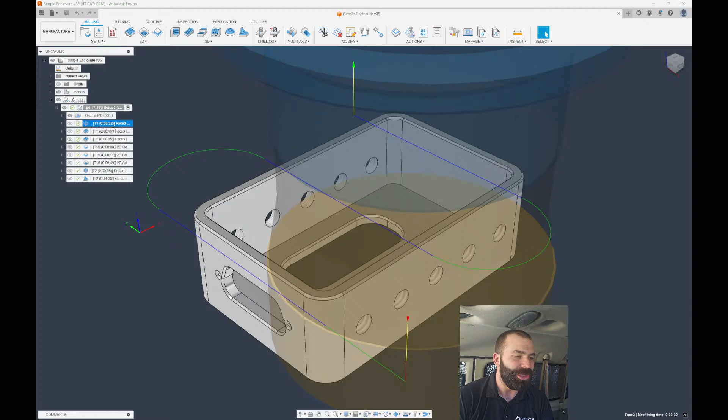I'm here to answer in any way possible. I'm going to make sure we're all the way scrolled down on chat over here, and I'm going to pull out the simple enclosure file. Now bear with me, I am on Starlink, so if it gets a little spotty we'll go ahead and be able to fix that as we go. So come on, we're going to let this thing load up. I guess I should have opened some files, that's on me. If any of you guys know, on a slow internet connection, Fusion can be a little slow. But as you can see here, I have toolpaths already on a part.

Now a question I saw on Facebook was, hey, I would like to add notes to a specific toolpath. So a lot of people came around and said things like you can do a manual NC and add a comment, things of that nature. But this is kind of, the whole manual NC thing works good, but what can happen with that is it's for programming stops and things of that nature.

Now I can actually put a note on a toolpath, which is super neat here. So we can edit notes and then you could say, check tool. Or actually, what would be a really good one is tool uses offset, whatever, right, 107 for diameter. So the cool thing with these notes is on your toolpath, you get that little note symbol next to that actual physical path. But when you post out this G-code, the great thing is it is going to post out.

And then depending on what post you're using, I'm going to go ahead and swap out to a simpler post. And what you need to turn on is called show notes.

So under formats here in this post, if I turn on show notes, what's going to happen is all of those toolpath notes that you've plugged into Fusion are automatically going to be output inside of your G-code right after the statement of that toolpath.

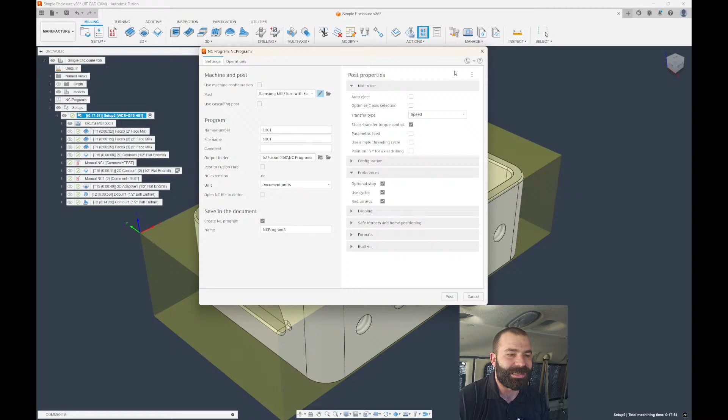It does give me a perfect chance to grab a water real quick. It's been a rough week for yours truly, going from SHOT Show all the way back down into Iowa, traveling across country.

And I'm not seeing a whole lot in chat. You guys just come in here to hang out with me. Usually you guys are flooding me with questions by this point. I feel like it's always, I've got to get this thing going in the first 20 minutes, and then all of a sudden it takes off, right? So, cool, not seeing a whole lot of... oh, there's Deep Thinker.

Is there a way to do serial numbering? So actually at the moment, Deep Thinker, there is not a way to do serial numbering inside of Fusion. But as we've talked about, depending on your machine, it's going to be a sub-program or sub-routine call-out. You can enter that in as a pass-through, and upon it being a pass-through, you could put whatever that information is, and that would call it out. So if it was an M98P, let's go 2525 call-out, when I post that out based on my tool paths here.

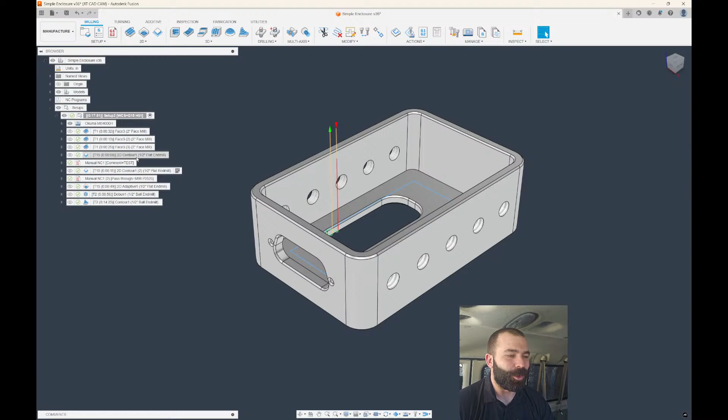But did any of you guys see in this latest update the new Heights stuff they did to us? I'm surprised more people haven't freaked out about that. In the Heights tab, you now have these lovely icons, as almost like yours truly over here made a suggestion that it would be nice to be able to say highest of, but yet do something like this. We're going to swap things over so we could show this in a more real-time scenario, right? I got to think where my parts are going to be here. Actually, we're going to go for a part in the default library. So cam samples, and we need a part with a jig and a fixture and everything all in one, right? Here we go, intro to 3+2.

So one of my favorite things is the fact that now we have control in a different way, right? So like on a toolpath, I'm going to just go ahead and dump everything here so we could just do brand new toolpaths on this part. But if I was to go in and just say 3D adaptive clearing, the old, like when they made that jump from the Heights tab, and this is what drives me mad, is they brought back stock bottom for all of the traditional kind of guys out there. But as you're going to see is I'm going to go down, and this was my thing about this, right?

Like I want to go to a bottom height, and what I would like to say is lowest, but then I also want to be saying, highest of top of fixture, right? So again, it's going to look at the lowest of stock. We're going to look at the lowest of bottom. Actually, we're going to go ahead and ignore. And then it's going to still respect the highest of the top of our fixture. This was a big thing to me. And it's going to take me some adjusting, as it's probably going to take all of you time to adjust to this new system.

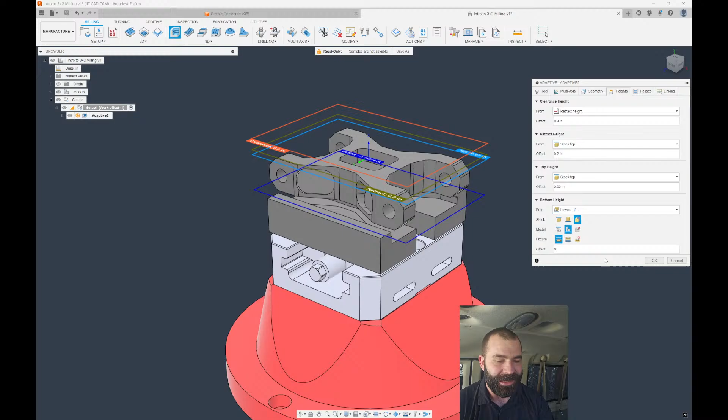But the fact that you can now say lowest, but yet still use the highest of a certain situation, right? This is something massive to consider in these different scenarios of how you're going to program your part or set yourself up for success with templates. This was super neat to me, to be able to go down to model bottom or go to the lowest.

What is lower? Is model bottom lower, or is my fixture top the actual lowest point? This is something I absolutely love, guys. This was a good one on Autodesk's part, by all means.

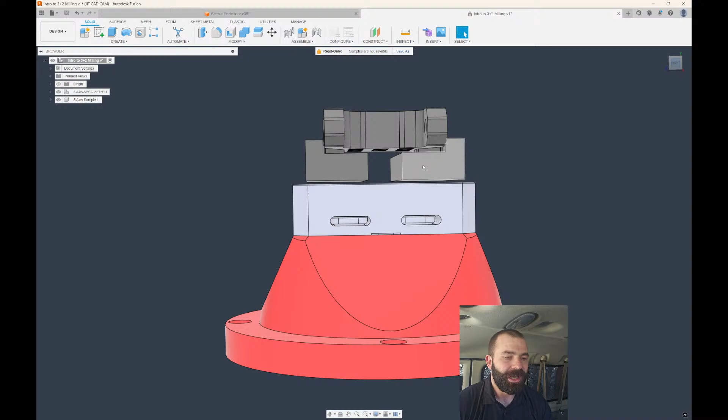To see how this can actually work out really well, if I was to move said part, we're going to need to not pick a face, but a component. And if we were to drop our component down inside of our jig and fixture, now our model bottom is no longer that part. So we go back into our manufacture and regenerate this toolpath.

What you'll see is we're going to respect the lowest point. In this case, we actually hit our jig because we're avoiding our fixture, due to fixture avoidance in our setup. But as you can see, we're now able to machine down based on those settings we've put to the lowest point possible. Our model bottom now exceeds the fixture top, meaning our toolpath can actually go lower. And because of our fixture avoidance, it's now avoiding hitting our actual fixtures.

So I'm going to jump over to show you guys this fixture avoidance setting. We have a default setting of a certain amount. Now if we want to change that default for just this toolpath, we could type in a negative value, and it will reduce it—not a full inch, let's go 100 thou. It will reduce that temporarily for just that toolpath.

I think you guys lost me again as my live stream is cutting out. This is obviously not going the best, but I'm going to keep talking as if it's going to work eventually. Let's go ahead and get back in here and see if this loads. There we go, we should be back.

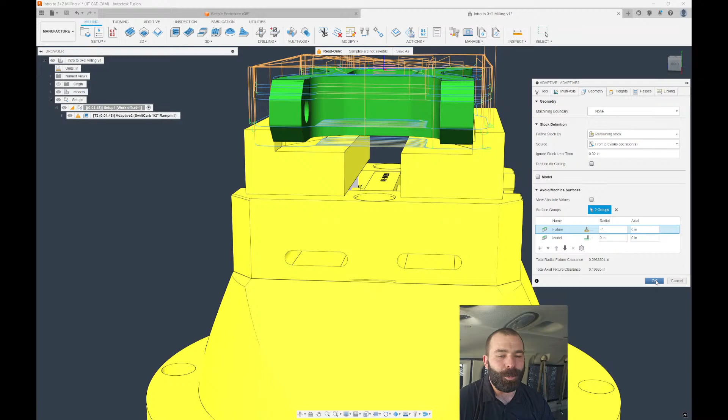But as you can see, we have the ability to adjust this strictly at the toolpath level, as if we were going to add an additional model at the toolpath level, or we can adjust it more globally at our setup level. So if we only want to avoid our jig by 50, we could plug in 50 instead here, and then globally it basically affects each and every toolpath.

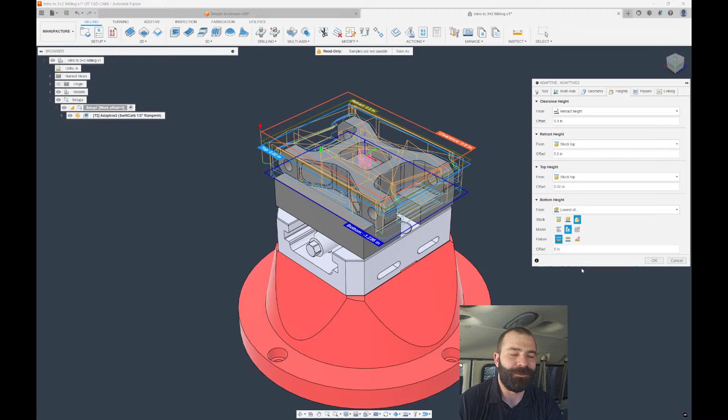So in my opinion, I like what they did with the heights tab. I like that they also brought back the traditional stock top, model bottom type thing, because I don't think one is right or wrong. The more I played with it, the more I like the highest of or lowest of option, because it will say upper or lower threshold, and I can see the value there as we start to work more in the future.

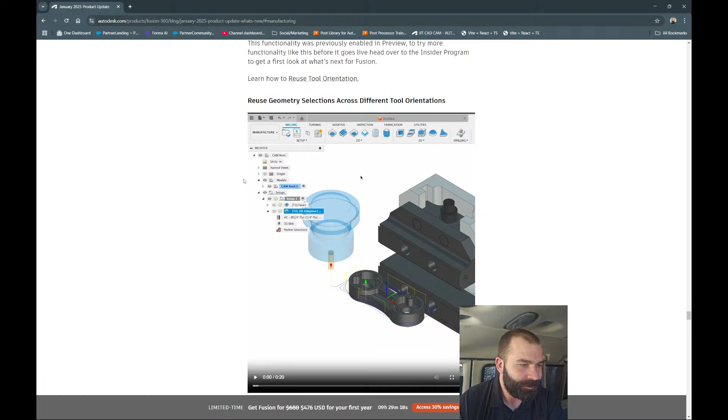Reuse geometry selection across different tool orientations. So you could reuse, I think they're setting a manual.

That's sick. Look at that. You can now pick your tool orientation and your pocket or chains from one to the other. That's going to be super nifty.

I'm going to challenge you guys. Who could actually come up with one of the most creative ways to use this? Because I see this, and to me, if I was to go in, let's just do this with a 2D toolpath. Let's really put it through its paces, right?

Tool orientation, we're going to go here. And we're going to pick that pocket, of course. So I'm going to go ahead and pick the floor. Geometry, boom. And now if I wanted to do another toolpath, got to go ahead and flip that here.

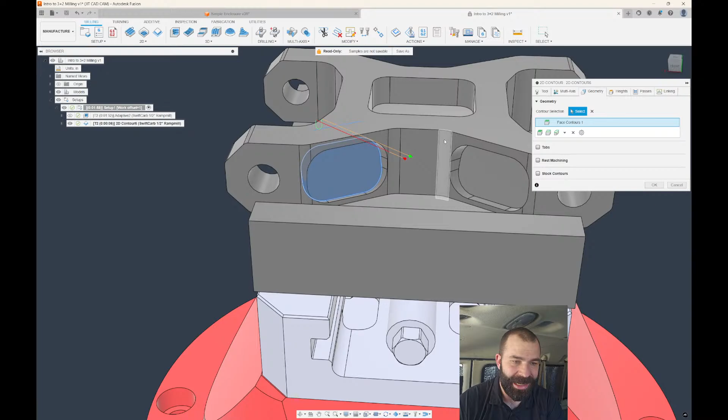So I've had this happen before, and I am really happy it's happening right now because I had a customer come to me about something. Do you guys see how I'm picking that floor and it's giving me the option by default?

Pretty sure Autodesk has changed something, but it's doing a face contour. Now, face contour is handy as heck if you're doing like a flat surface and you want to chamfer around a part, you can use that face contour.

But they were going through and they were picking all the chains on something, and I said, dude, what are you doing? And the reason is because it used to actually by default do a pocket selection, and that's what I wanted here. So I'm super happy this popped up.

But if I pick that face based on a pocket selection, notice how I get my hard line boundary back around my part. So as you can see, again, I've now got my toolpath. My toolpath has a contour selection.

It also has a tool orientation here, which means if we were living life dangerous, which why not, right? Let's do trying to think what's going to be fun. Let's do a scallop. Can we just go from 2D to 3D?

So if I go in and I say tool orientation, coordinate system is this guy. Oh, look at that. Automatic tool orientation based on that other tool path.

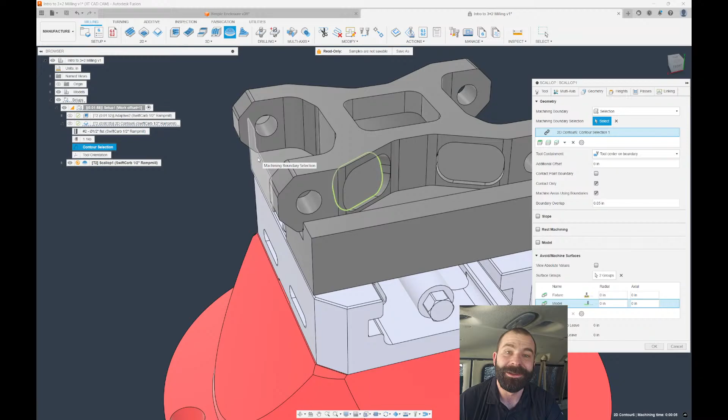And then geometry-wise, I'm going to assume we can't do a boundary selection. Oh, you can. You guys see this? This is wild. Now, what's really neat is this is linked.

So if one changes, I'm assuming the other one is going to automatically update as well, right? That is super, super neat.

So again, terrible toolpath, guys. I agree with any of you before you say anything in chat.

See, oh, we got all kinds of messages in chat. Sorry, guys, they're just starting to come in.

So, rebuild a PC and lost your entire tool library. So PC Alpha, let me show you something here. So what you need to do is you need to go to your preferences.

And in your preferences, you need to actually go to manufacture and turn on your cloud library. So make sure you turn on your cloud library.

Again, I'm going to put this on Autodesk because apparently they listened about fixture top as the lowest. But why isn't the cloud library enabled by default on everybody's license? I don't get it. I really don't.

But we're going to enable that cloud library. And upon checking that box, what we're going to do is if we look at our tool library, what you're going to notice is I now have the cloud area. So let's shrink these up a little bit.

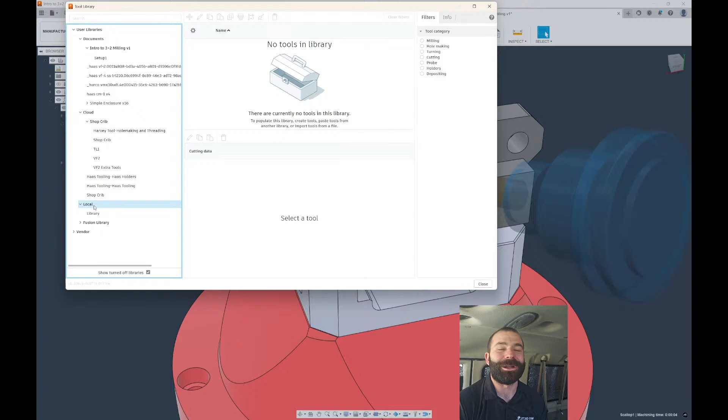So you would normally just have local, but now I have cloud. If you've lost all your tools because your computer died, one big thing is stop saving them to your local area. Now, I am the exception to the rule because I have to edit machines and tools for a lot of you guys who put in tickets with me. That's why I put them in my local area, it's a temporary bucket that I clean out periodically. But as you can see, I have my cloud area. If I was using Haas tool holders or a VF2 machine, I can keep that in the cloud, allowing everybody on my team to use it. Also, when I'm on the road, I jump from a laptop to my desktop at my house, and everything moves back and forth super clean. So it should work more than acceptable for everybody on the shop floor. So PC, I hope that kind of answers your question on how to fix that.

And Deep Thinker, I see that you jumped in there. I appreciate it. Yes, 100%, put it in the cloud.

We got Matt Van Loo with super long cycle times again today, so he's joining the chat.

TC, I don't think you can ever actually be new to this or not new to this, right? Like this new update, as a guy that's been using Fusion for 8 years now, it's crazy to me that all these updates come out and I feel new to it. You guys saw it in real time when I opened up Fusion today and I was like, boom, oh wow, the heights tab has changed, right? Again, we're either back to stock or your highest settings, and the icons and all the stuff that happens.

As I tell most people, I have no idea what I'm doing. That's my big thing, right? I just know how to figure it out or how to make it work. But outside of it, awesome, cool.

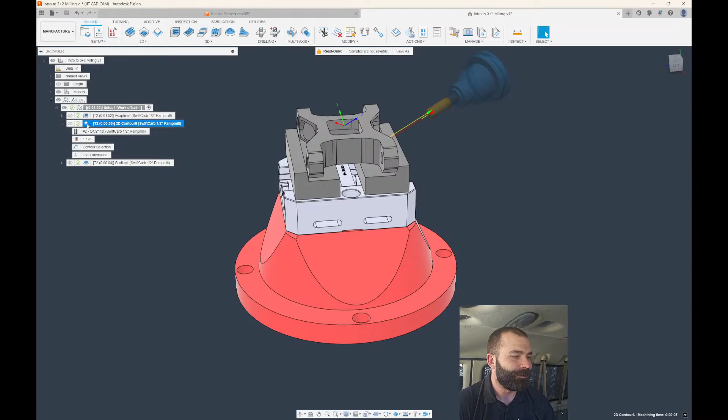So I'm going to show you another one while we wait for a ton more questions to come in. I'm going to think about the best way that I can get this to happen, and I think it's going to work better with 3D, but I want to check it in 2D. So as we're going to see, yep, okay, cool. So in 3D toolpaths, especially getting into your...

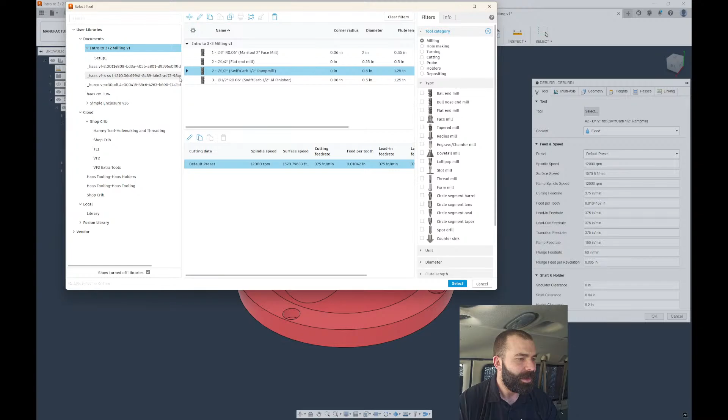So the clearance geometry is pretty big at the end of the day. We're going to go ahead and click on tool orientation again because what I want to do is get you guys set up. Let's go ahead and switch toolpaths altogether. This might not be it, let's do a deburr toolpath. I believe deburr is going to have what we need. So let's get our ball end mill from somewhere.

There we go, let's go full 5-axis. Now, as you're seeing, our geometries by default are set to automatic. But I wanted to create this system because I've gotten this question a couple times over the last week, where using 5-axis, you can see how all of your clearances may or may not be jumping a mile away from your part or over traveling your machine. So this was something somebody brought to me.

For this sake, let's narrow down what we're doing. I'm going to say selection only, and I only want to do this space here. Let me get a real nasty version. There we go. Notice how far this tool is coming in on this part. This could over travel your machine and cause a lot of problems, right?

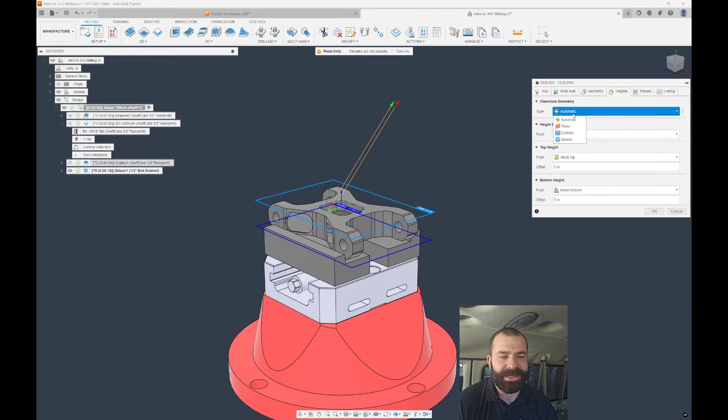Well, what we can do is customize our heights based on different types of modes. One thing we could do is set a clearance based on maybe a sphere. That sphere needs to come from a point if you're going to set that manually, so I'd need a sketch point to go off of, or in this case, we could go based on our setup WCS origin.

And then we have the ability to create things like a specific diameter. This is kind of neat. If you set that diameter to say 3 inches, now all my clearances come from that ball diameter. So what's neat is my lead ins, lead outs, and linkings have now been modified to that sphere and then come down into my part.

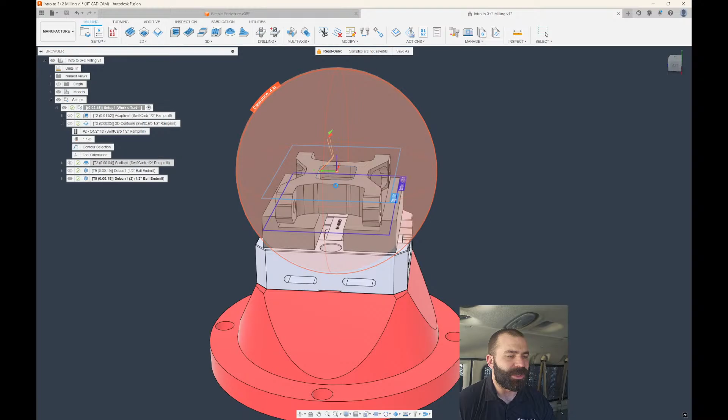So if I duplicate for another example here, again we're going to go in, and this time we'll say maybe an 8-inch sphere. What you're going to notice is we're getting different results on how that tool interacts with our part and where it's going to start from to get down inside of there. So again, we could duplicate that.

We could switch out from a cylinder. Let's actually go to a cylinder, direction based on our setup X. The same thing is going to apply again. Now, if we added a lot more toolpaths here, we could also change that diameter going back down to like 3 inches, and we'll get a similar result as you guys saw.

So this is getting into collision avoidance and how we lead and link things into our part. You have full control over that based on those settings. Now, something you can do outside of that, I'm going to go back to the original one and set that back to automatic. A lot of people haven't realized yet, but you have the same ability to control stuff up here at the top under modify.

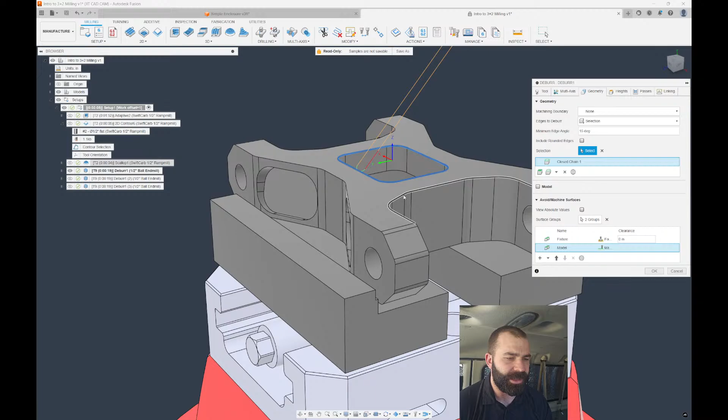So you have your leads and linking moves. Again, you can modify them also using the same kind of theory and strategy for when it's going to jump from one place to another. If we were to add in a few more chains here, let's go to my geometry. Let's say we want to do this edge and this edge. Now what you're going to see is notice how we're jumping up super high in the sky.

But if we were to do a lead and link modification, we could actually go through and modify all moves if we wanted, or we could do individual moves. Again, you have that ability to select things. For example, we start here very far away from our part, and then we're going to retract way up. So I would like to modify these two and only those two.

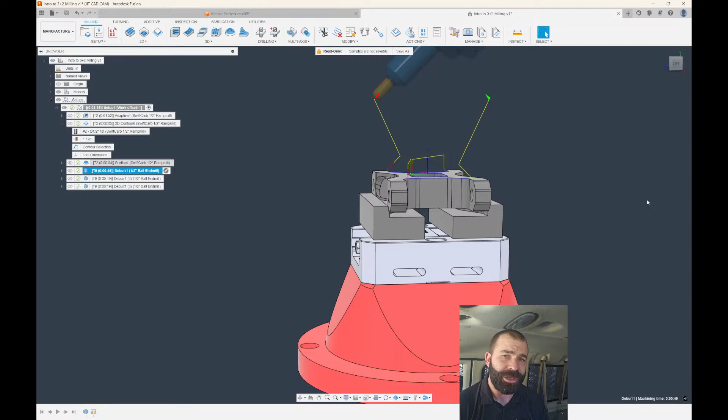Let's just leave it by default because, as you guys know, I'm a firm believer of hitting OK. Let's go ahead and see what we get for a result. So we can individually manipulate leads and linking moves. Again, you have to have the extension to Fusion in order to do this, but this is very, very handy when you're getting into wild 5-axis type stuff.

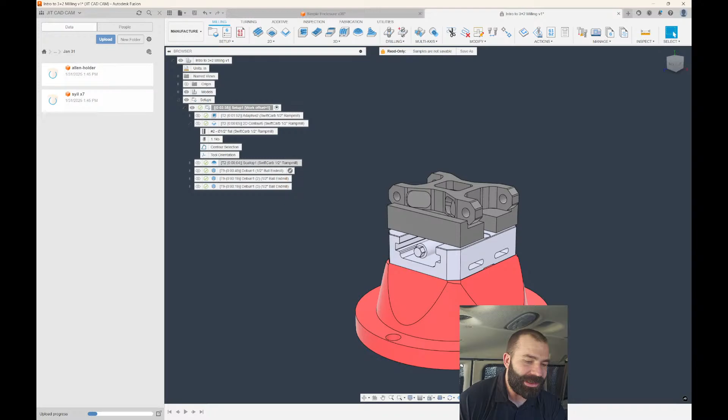Other than that, you guys, how's everybody's week going? Let me turn my mic down just a touch - I could do that. All right, let's see here. Get the mic turned down. Is that better? You guys still hear me? Not peaking out as bad?

I get a little excited once we get going and I start yelling. For anybody that's met me in person, you guys know I'm a loud person in the first place.

All right, so we got our part. Oh, this is a good part too - let's see some stuff on this part, this is a really good part. So the question is the way he was facing off this part, I'm going to go ahead and flip some things around here real quick. We have the ability to change our path direction, of course.

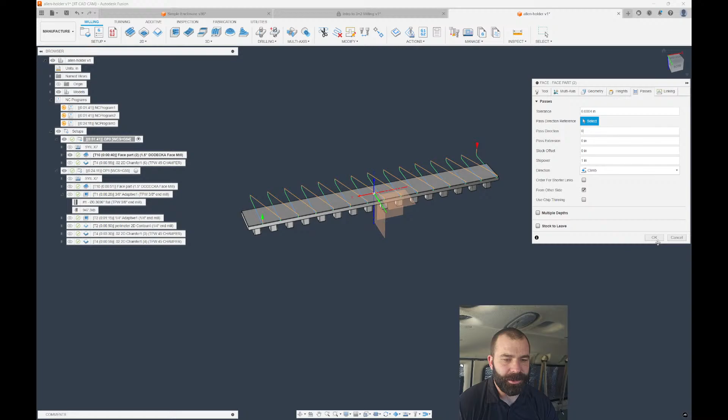Oh, let's see what we got going on here. Stock offset - oh, you got it set there at 90, we're going to go ahead and zero that out. There we go. So the problem that Jeff was asking was the ability to go ahead and face off a part, but he's almost over traveling his machine.

So the good news is I think he has his machine in here, so let's go ahead and do a simulate with machine. And as you guys can see, we have our machine. And if we go ahead and simulate what's going on, the problem is on his machine, which will look a little weird, but his travel is actually limited down here. He can't get his spindle as far over left and right as some of you guys may be able to do. But he was curious, is there a way to start and bring that tool in kind of in an L shape?

By default, there's no real easy way to do this. With this toolpath, he's just making maybe one pass, or two passes based on a step over. So what he could do in this situation is actually use a trace toolpath to achieve what he's trying to do. I've seen this before, and it's a super neat way to do it.

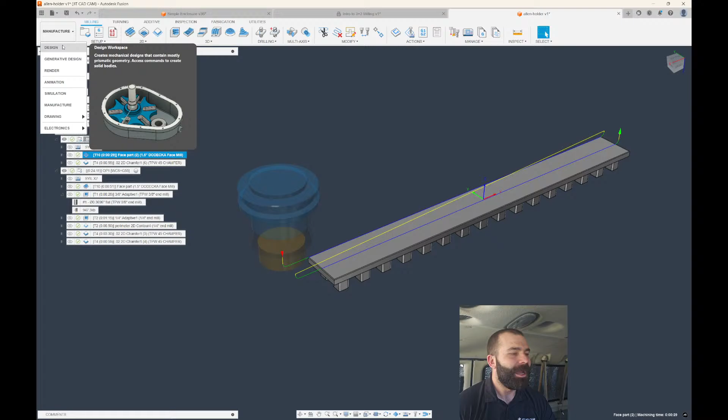If we create a sketch on that top face, and create the kind of profile that I want my tool to follow, I'll make this very generic here. Then with that, I have the ability to grab these edges or constrain them using my actual constraint tools or dimensioning.

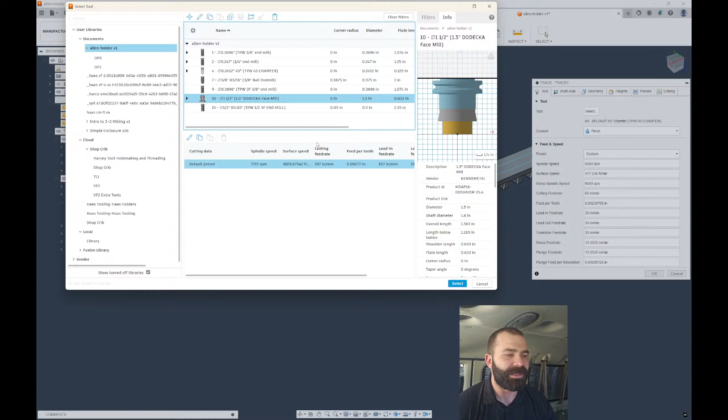Going back to the manufacture side of things, the reason why a trace toolpath here would be extremely beneficial is because I can select using the center line of the tool off that sketched line. He's got a 1.5 inch tool here. Our geometry is now going to be this edge, which runs down and around. As you can see, my toolpath follows my sketch.

So if he's facing an x-axis over travel issue, using that sketched profile, I can use that to my advantage to control how that tool enters in, as he was asking, on the y-axis because of his over travel.

Keep in mind, yes, I know we're conventional milling on this feed move. I just wanted to show you the system of creating that sketch. We should probably go the other way at the end of the day so we're making that lovely clean cut. But what you're seeing is the ability to run down that part, come off whatever that distance is, and then run back across that part and exit.

Now, I could have added another line here. Yes, there's a lot of things I could have done to fix this. I think I just lost video, but it seems like I don't actually lose video. You guys are still watching me live. Hopefully I'll come back here in a second.

Usually takes a second, so let me pull myself back up. But the idea is still the same, you're seeing me do this with nothing more than a trace toolpath. So let's slow that down a little bit.

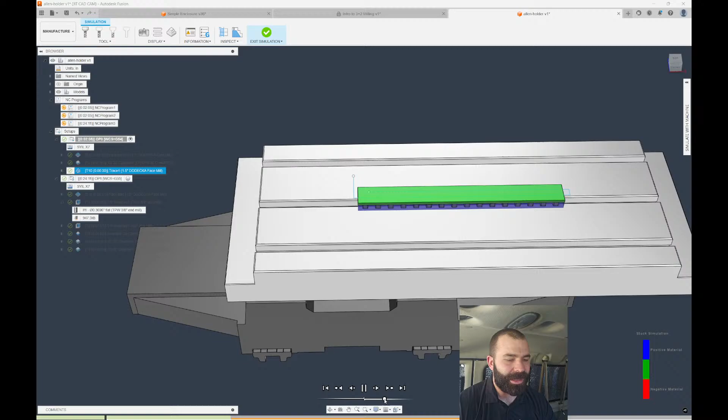Again, I can now manually control that facing operation to come into that part and come down and around. We could add a second dog leg there if we want, or extend that first chain to go around. We could of course do things like multiple depths, all fully controllable inside the software. It isn't going to be as automatic, but the idea is still the same - if I wanted to make 3 step downs, there are my 3 step downs at whatever dimension to create those profiles.

So again, just a little different way of thinking. As you can see, I'm able to go in and create that profile and define that to be able to machine off using that actual sketch that I created.

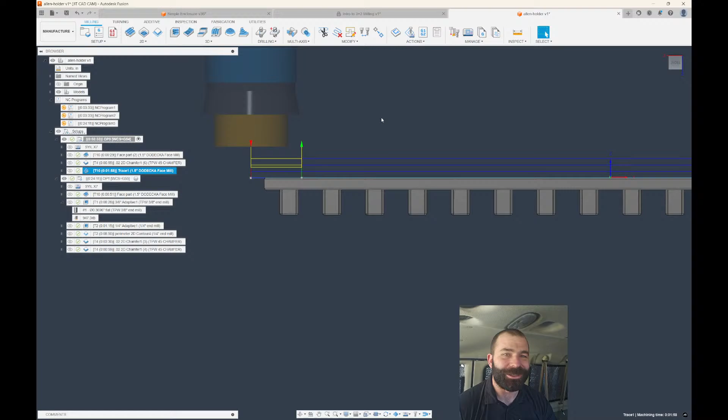Now, shout out to another Phil, which you guys are going to laugh about. There's a Part Maker Phil out there that I worked with. He uses Part Maker, he's the wizard, as you may say the grand old man of Part Maker. He showed me this technique in Part Maker when we were looking at doing a part, and I'm going to sketch this for you guys.

Let's just say we have a round part. Props if you guys can find the video where I think he does this - I'm not going to tell you where it is. But if you had a part like this, and we have a cutout on that part, we're going to go ahead and do this, and we might bring that up just a hair.

I assume you guys get an absolute kick out of watching me model stuff every once in a while, but I think we're all guilty of this, right? So for some reason, an engineer out there has put a 60 thou radius here, and we need to basically machine this flat and cut that fillet. Now, a lot of you are probably already thinking there's a lot of ways to do that - we could have gone in, and let's get this set up here, Z-axis up.

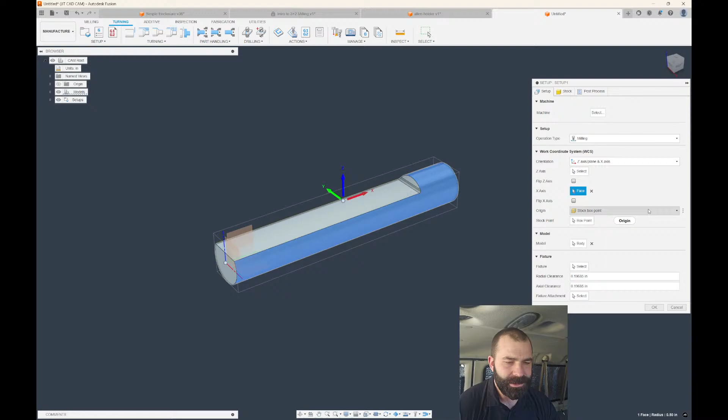We are not on a lathe today. We're going to go ahead and use some round stock based on an axis, rounded up by zero, of course. And with that, we have our Z-axis. Let's go ahead and do this as if it's going to be on an axis-rotated machine, right? So we're going to do this in the rotary, or you just put it in the vise. You need to rotate it. But that same concept still comes into play here.

So if I needed to go in and machine something like this, I think a lot of us are thinking, oh yeah, Fusion and Phil, you could do that with adaptive clearing, right? And we could pick our pocket, or as you'll see, I'll actually say this is my pocket to work with. Let me hold my Alt key this time. And then maybe I want to machine down to a selected floor. And then I know my tool in this case.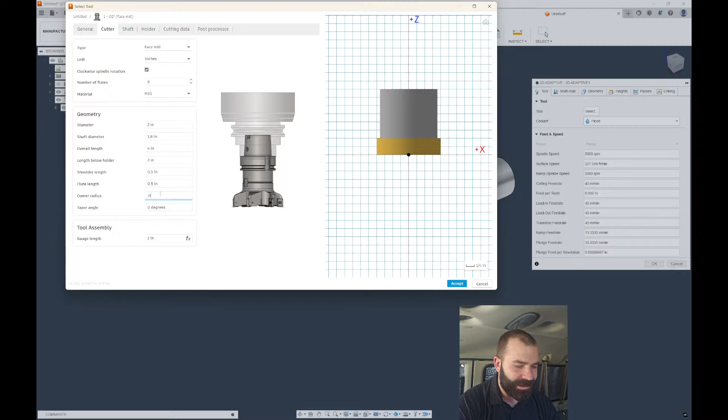We're going to build one. So let's go with, trying to think what's going to be the easiest, let's call the old face mill out. And that face mill has a 60 thou radius, identical kind of to what we're doing, right? And as you're going to see, we're now doing an adaptive clearing toolpath. Of course, I'm going to clean up the floor. And then what I'm also going to do is we're going to hit this with a finishing 2D contour, right?

Same edge. Yes, guys, I could have derived this, I get it. Let's extend it by like 1, 2. And now, for those of you that didn't know this, you could do multiple passes, of course, to get your floor all at once. So let's say we're going to do 10 passes at 1.8 step over.

And what we're going to get is a lot of extra passes, right? So this is another pro tip for a lot of you guys out there.

Matt, you're 100% correct. Your boy is still alive in the $500 van that I drove all the way to Vermont and realized you're much shorter in person.

So you guys may not know this, but upon applying stock here, because of the way Fusion thinks, it always thinks a to-and-from scenario. So by adding stock, it's now thinking from that stock boundary all the way to that edge. But this might look familiar to you, right? Like we roughed it out, we went back, we went ahead and machined it into a flat.

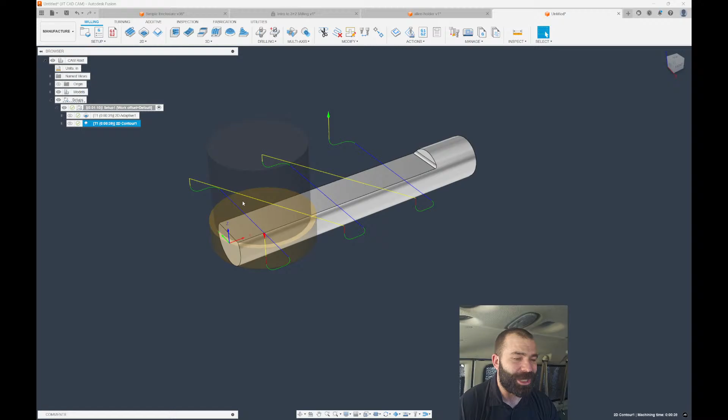Now, the thing is, this is very inefficient in a production environment, right? We're wasting a lot of time here. So this is where the shout out goes to good old Phil Jennings, is the ability to go back to design and use that exact same method with the trace toolpath.

But this time, what I'm going to do is I'm going to create my line, and then I'm actually going to come off my part, back up. Actually, we're going to stop here because I'm going the wrong direction. So let's back up.

So let's go this way so that we can come in with that last pass across and actually mill the shoulder all in one shot, right? So what's going to happen here is we're now going to dimension some stuff, which is going to require a projection of this edge, because that's my finished wall. So now I can dimension from that lovely purple line back there out. And we know that's a 2-inch mill, so we need a 1-inch here.

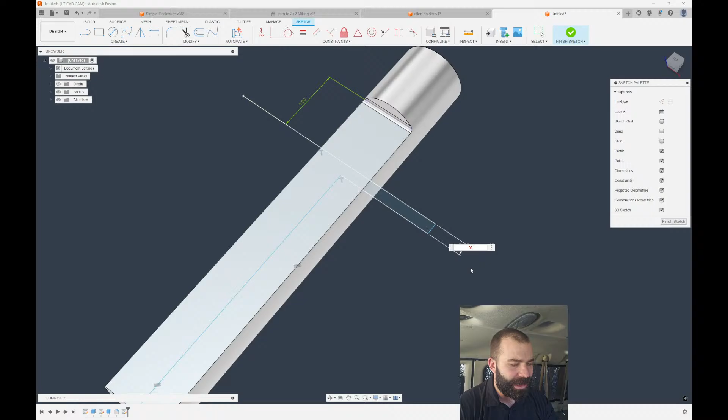And then what I'm going to do is I'm actually going to set that finish pass across there, right? So I know I want about a 30 thou material left on the wall scenario that allows me to make that finish pass.

Again, guys, yes, we could do a horizontal vertical now, align this guy. I could also, for the record, set a dimension from the end. 2-inch face mill, we probably want to start 1.25 inches away. But notice how I'm using this exact same technique as we just did in Jeff's case to come in and machine that edge as clean as possible and eliminate the over travel on his machine.

So when we go back into manufacture, this time I can again use trace. And then with that trace toolpath, I simply pick my geometry. Now, pick it the first time, click it a second time. You can also edit it over here. But what I'm doing is I'm linking that full toolpath down and around, right? Now, when I created my sketch, I automatically accommodated the ability to do my extension, right? So from that, we have our profile.

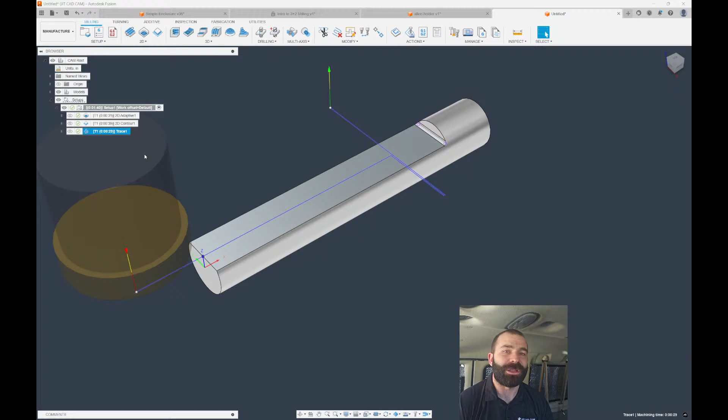We can now go down that part, come out, over, and around, and machine that wall all in one pass. Looking at our cycle times and time savings, which is very key, according to Fusion's calculations, not mine, we're going to go from somewhere like 1:20 to 1:05 down to 30 seconds to achieve that task.

And if we had to, you could always do multiple depths, like a 2-depth situation at 40 thou. So again, we didn't need to, we just added an additional pass. Let's go back and change that to 1. So that's one additional pass. As you can see, we make a roughing pass and then we reset and make our final pass.

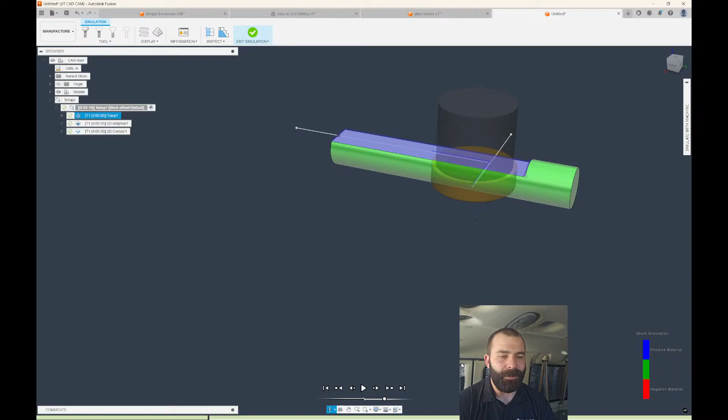So when we're machining that material, let's get it turned on here so you guys can see it. Simulating this, we come in and machine down that shaft, come out of our cut, and then come back in, allowing us to cut that actual flat using the side of our end mill. Now I'm using a face mill, but you guys can use anything else you want. I'm just here to show you a different way of thinking, especially when talking about high production machining. So again, coming down, using that sketched edge to eliminate cycle time and create an all-in-one toolpath, as you can see.

How do you guys feel about that? Let me know in chat. Is this something you haven't thought of? Were you guys shocked by the fact that Jeff brought me a part and we went ahead and just used trace instead to go and face it off?

Got to go ahead and turn my heater back on, my toes are getting cold.

Any other questions from anybody and everybody out there? We're here for you guys, we're here to help you in any way we can. I was a little skeptical about the live feed from the inside of the van.

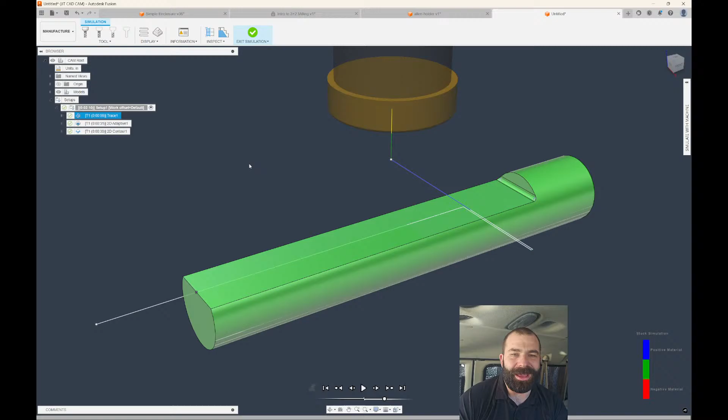TC Alpha, chip thinning, I think you had a pretty good idea there. However, I don't think it's going to give him the control he wanted on that facing operation, because you definitely don't get the ability to do anything like pick a lead-in position or anything of that nature. So I think in the case of what he did by changing his passes to a different direction, that actually worked out quite well. But outside of that, he might have to go through and pick a little different way to go in.

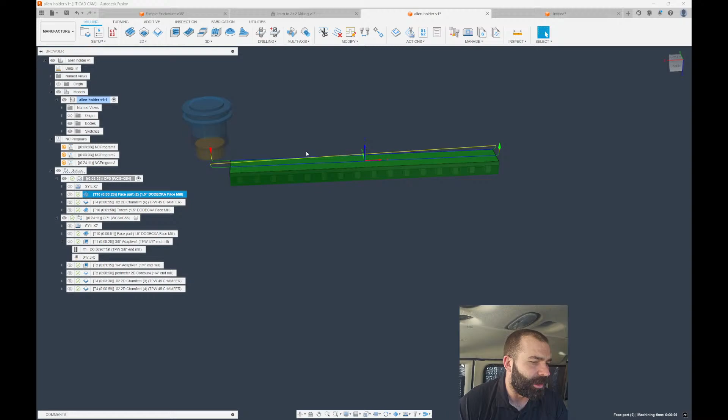Now chip thinning is going to bring it across the y-axis more, but I think his real problem is he didn't have the actual x-axis travel. So for anybody out there that doesn't know, let me clean this up here a little bit and get that sketch out of the way. If you're going to face something off, notice how we're feeding straight into the part. When you feed straight in, you have a tendency to go in slotting, which can load up that tool and cause deflection.

I actually saw a post on Facebook, this was super interesting to me. Somebody was saying 'my new Haas machine does not make this plate flat.' He had a picture, I think some of you guys saw it, and there was about a 3 thou variance from all 4 corners. Now where that actual face mill fed in, deflected, and then as it came off the part and came back in and off again, it affected all 4 corners of what he was doing.

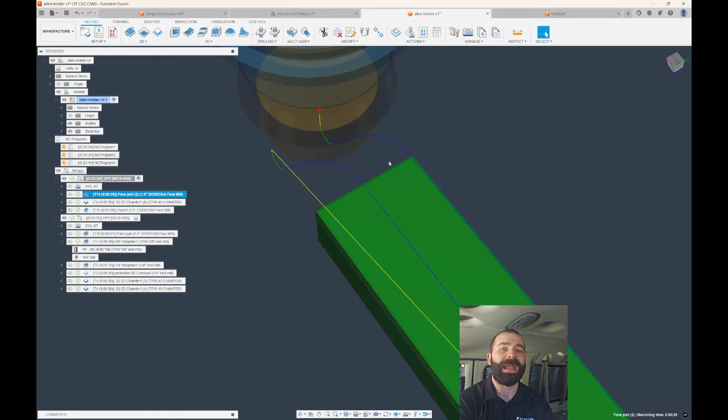So as you saw with PC Alpha, he said chip thinning. The cool thing with chip thinning is this is going to allow us to slowly cut into our part. So instead of slamming or plunging straight into that part and loading up that tool, we could actually come in and slowly arc into that part, meaning we're climbing into our cut, right? So again, chip thinning, super helpful.

I cannot speak for the fact that maybe this would work for Jeff's situation, I'd be curious to hear. But I think Jeff's situation is he just didn't have the distance in the X to start out to the left.

Can I look at the rest of the operations and tell you if they're efficient? Sure thing. So as you guys saw here, he's faced it off, and he's breaking his edges on the backside using what looks like a chamfer. My lovely trace facing operation.

So as you guys can see, we're going to go ahead and flip over our part to his next setup.

Elijah, I see you out there. Am I in the FBI surveillance van? No, I'm actually in the JIT CAD CAM surveillance van. We are spying on our customers across the country to make sure that all of you guys are trained up to be as efficient as possible.

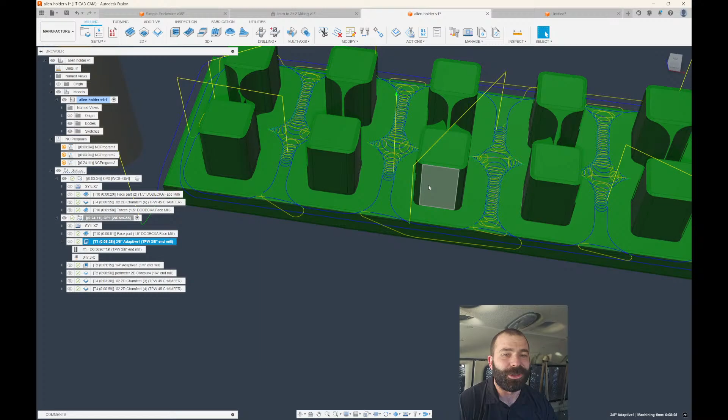But as you can see, he's using 3D adaptive clearing. Looks like a beautiful tool path. Now, this might be a spot where a lot of people are going to argue about this. Jeff, I don't think you're wrong, and I don't think they're right. But given that you're doing all these small little arcs and loading up and deloading the tool, some people may want to look at this and do something like a pocket clearing and then use a high feed mill.

Now, you're on a SYIL machine. I'm going to take the assumption that the X7 is much newer, which can handle a lot faster feed rates. So in a case like this, I may look at it and say, first thing, what does it look like with pocket clearing?

Right, so again, we're utilizing the same geometry. We're going to go ahead and turn our boundaries off. And then what we're going to have is a maximum step down in here somewhere. So I'm going to take an educated guess and say we're probably going to do like a 30 thou step down if we were high feed. And with that, we're going to get a much different result, but we're also going to have rest machining here in a minute that's going to piss me off.

Not in a bad way. It's just because when you're trying to compare tool paths, it doesn't work the best when you have rest machining turned on after another tool path. So again, we'll give this a second.

As you can see, this is very straight line and linear. We are getting some very funky moves. I blame Jeff on this one because he probably changed something at some point. But we may be able to machine this part faster and cleaner with high feed, right?

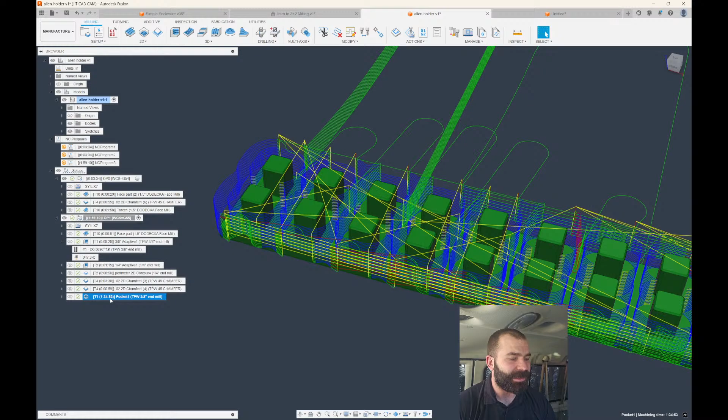So from a time standpoint, I'm still using that speeds and feeds that he used for shouldering. Now, if we were to do pocket clearing, we may see something like in excess of 230 inches per minute. And again, we could actually speed up our lead ins and lead outs as well. So I'm just going to manually override a lot of this.

And again, ramp would be way up there. But what I'm trying to give you guys is that idea of when you're trying to remove a volume of material, again, we reduced that tool path. We didn't quite get down to where he was. Again, if he was having problems with a jerky machine, or if you guys are on a super old machine.

Jeff, I see you there. It's aluminum. Thank goodness it's aluminum. But if you're on an older machine like a Fadal or something that doesn't have look ahead, pocket clearing is going to be a better scenario.

So in this case, this is an aluminum part. It's pretty much effortless for this tool to go in there. Other than I hear a lot of times people complain that they just don't like a jerky machine. It's probably a little violent. I would love to see a video, Jeff. It would be awesome to see. But I don't think you're wrong.

Let's get that there. As you can see, Jeff is then coming back, which is a little surprising to me. I see what's going on. So this is where he isn't able to split between these parts because he has a 375 gap, and he is using, I believe, a 3/8 tool, right?

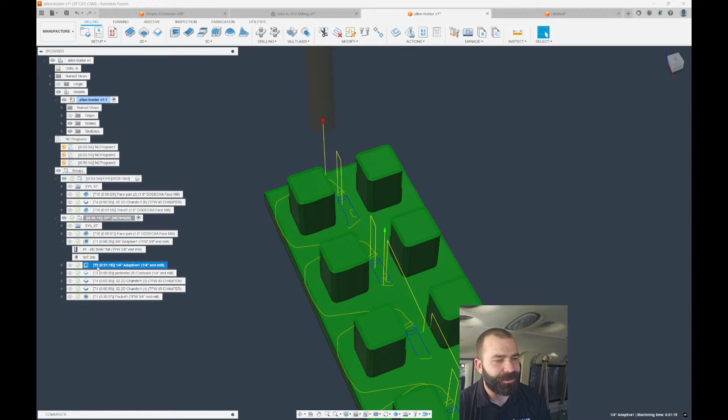So again, rest machining to clean out the areas with a smaller tool, 1/4 inch adaptive. I think this works great. So now he's coming back and he's cleaning this up.

Now, this is where the magic is going to happen, because I have a hunch, Jeff, that you, maybe I should turn my screen off before I look. Oh, yes. All right. So, Jeff, we're going to get the same results here, but the thing is I'm going to show you an easier way to pick all these edges, right?

So Jeff went through and picked each and every chain on this. Again, you guys can do this. You guys want to do this? You guys do this as much as you want. I would not do it this way. This is where I would use instead the ability to actually select these all using Pocket, right?

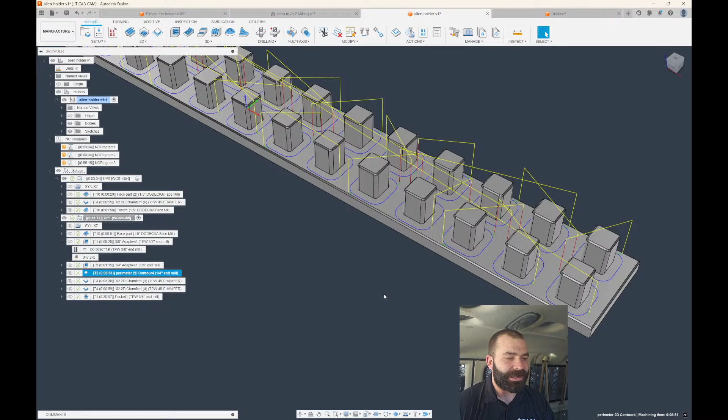So if I go into Pocket and I pick my floor, what you're going to notice is it's going to now go through and find all those hard edges, and it looks at that floor as an open pocket, right? So again, I'm going to get the same results, just with a heck of a lot less mouse clicks. This is a pro tip for you guys out there - you can use different selection methods to make your life a lot easier on parts like this.

Now again, he went around the top of each and every one of those to go ahead and chamfer them. Awesome. And from there, he went ahead and chamfered around the outside. So it looks like overall, other than maybe combining these two tool paths, I think for the most part, Jeff, you did quite a hell of a job on this.

Now, again, I'm going to test something because I have a theory here, and we're going to duplicate this. Jeff went ahead, and this is this chamfer tool path, using that exact same technique as you guys just saw me do, instead of picking all of these chains individually. Again, if I went through and said Pocket - now this is where you have to change the way you think, right guys? So we're going to go ahead and use Pocket selection again. Now I need to set my heights because initially it's selected contour. So I'm going to go in and select the lower edge of just one of them. And let's see if we get any results from this.

So again, this is where something like using that pocket selection - and it's got to be pocket, guys, it can't be face contour. But as you're looking, using pocket selection, I very quickly, in this case, was able to go grab everything. And this only works with something in the same Z plane, right?

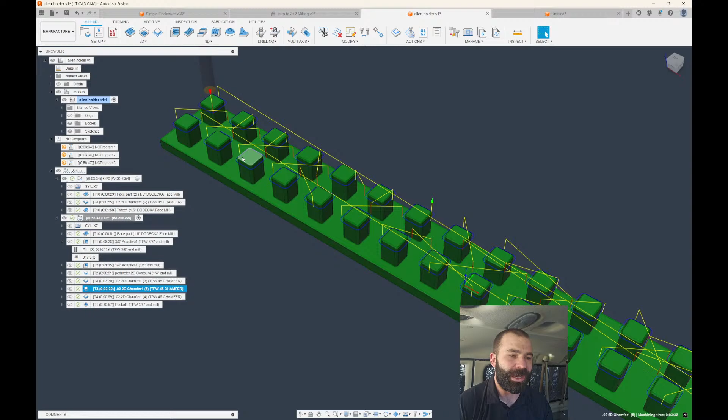Now, TC Alpha, great point. You could deburr this by all means. I think he's got model chamfers here. And Jeff, I'm going to take a hunch here, and I'm not trying to say anything bad, but I'm going to assume you also don't have the machining extension to have access to the deburr side of things, right? But as you can see, again, I don't think there's anything inefficient. If you would have sent me this part to do it, it would have been some of those rare occurrences, in my opinion, that I'm going to duplicate what you have here.

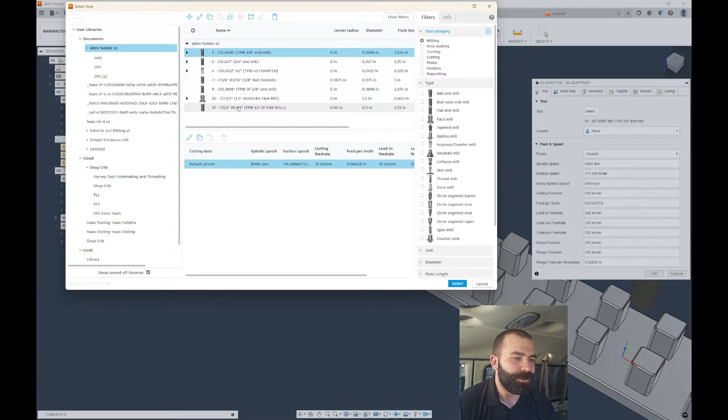Is if I was to program this up, we're going to go ahead and leave your face mill in there. I may have just did everything with 2D adaptive clearing, and that would allow me just to pick that floor. And then from there, turn on my stock. So let's go ahead and grab that 3/8 tool. The only reason I would do it this way, in my opinion, is because it is a very 2D part, right? But what that allows me to do is to rinse and repeat as I can shift things around here. So there's my roughing procedure. I could go through and derive.

And we're going to go 2D again, 2D adaptive clearing. We're going to go to our tools. Again, we're going to swap our tool out to that 1/4 inch. And then from there, as you guys see, we have our pocket. We turn on rest machining. I know that was a 3/8 tool. Excuse me there, sorry if I blew out anybody's eardrums.

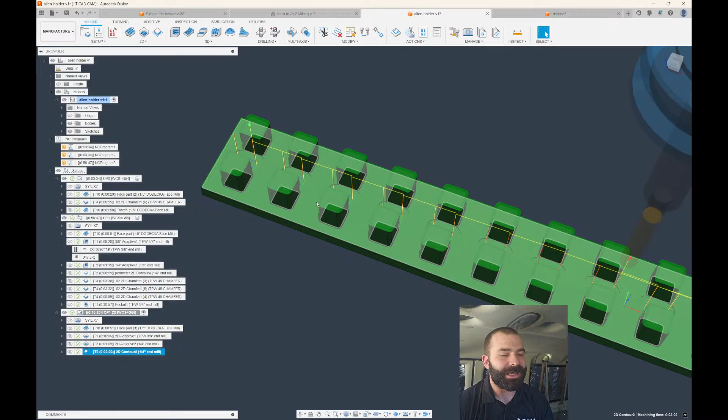Again, getting our rest machining the same way that he did. I don't think one is right or wrong, as you guys see. Again, we can hit it one more time. This time I go through, I do my contour around each one. And then lastly, I want to go ahead and chamfer some stuff, but this is a good thing. I love seeing when I do this stuff live, you guys see these problems, because it's amazing - I derived off of rest machining, so it automatically only stopped and it's doing those little slots.

Now, this is important to anybody new in here watching this or new to Fusion - get the blue lines on your parts, guys. It's the number one thing that I see people fail at. The ability to get a blue line allows me to go back and troubleshoot why I don't like those blue lines, right? So I knew right away the rest machining was the problem. So we can go ahead and turn that back on. And again, we could just rinse and repeat, guys. Again, another derive, 2D, straight into contour.

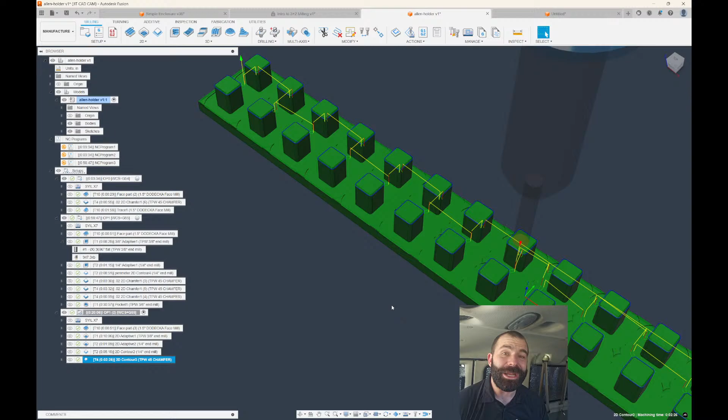I'm going to pick my actual chamfer tool now, so let's go ahead and get that 45-degree chamfer tool. I need to change my height, as you guys already seen me do. And this is where, like I said, I don't think anybody is right or wrong. I'm just using a lot of years of experience with very simple tool paths that normally you did the right way that I would suggest to people is 3D is your best friend if you're going to use templates.

But this all gets better. This is like we're going to roll this thing up into the way we started, because now that we have that ability to link things off of each other, I really want to see something here. Jeff, I'm super excited that you sent this part in, because if we take our tool paths here, I want to see, so it didn't link the actual geometry, right? But if we are manually linking our geometry here, let's go through and redo these couple of tool paths real quick. So what we're going to do is link everything off of one another, because I'm going to turn this into a template. We're going to see what happens.

So again, there's my second tool path. We're going to go ahead and regenerate that. I'm going to tell you right now, guys, if it wasn't for the fact that I don't have a high roof van, you would see me jump up and down if this thing is going to work the way I anticipate it to work.

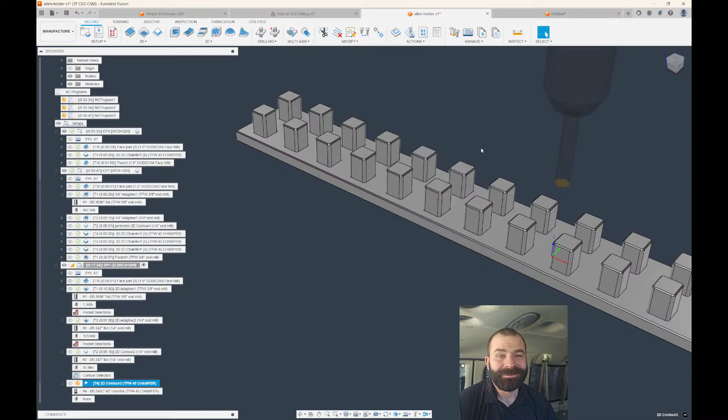Hey, there's nothing wrong with that, Jeff. First year, man. I feel like every year is my first year.

Okay, so we got everything linked, and I would like to prove, we're not even going to prove if it works, right? So all of my toolpath chains are now linked to one another. So if I was to change the first one, let's just say we're not going to use pocket this time. Let's just go around the outside, right?

Oh, we're going to need a bigger, we have rest machining on. We are going to ruin this file today. Hold on here real quick. Let's do a fixed size box, let's make it 14.25 by 1.75. There we go.

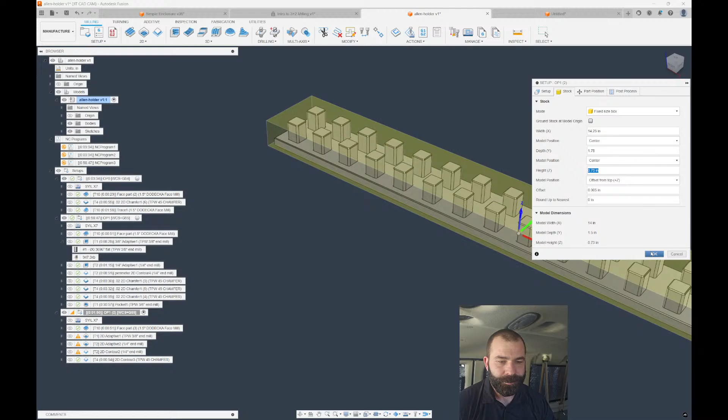So we're going to regenerate everything now. Check this out, so I only picked that outside chain, right? Take your bets, you guys think it pushed through to all my other tool paths or not? Because I'm thinking it did. So one, we can't rest machine anything right now because that smaller end mill that's second in order, because we only went around the outside of the part. But now our 2D finishing has actually worked.

And crazy enough, our chamfer has also worked, which is basically useless if we were to turn this into a template. But if I was to take these three tool paths and turn them into a template, which I think I'm going to do, let's just go for it, right? So what I'm going to do is not edit these. Let's go ahead and store as template.

And I feel so wrong saying 2D rough, rest, finish. Man, this is going to be wild. And then we're going to do what most of you guys hate to watch me do, and we're just going to rip everything out of here. And then let's paste it back in, I guess.

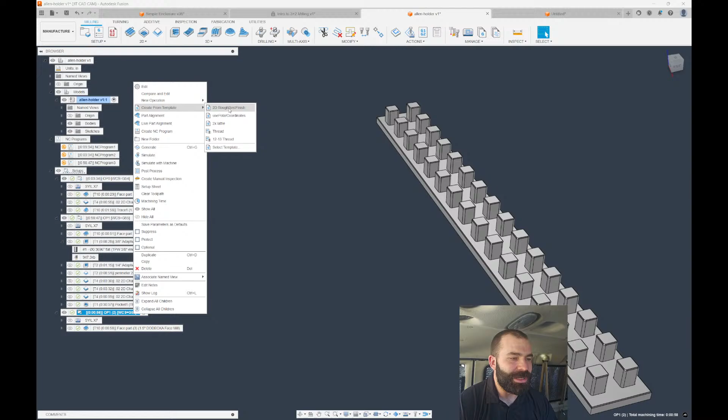So we're going to go ahead and create from template. We're going to do our 2D rough, rest, and finish. As you guys know, I'm a certified magician, love to do these magic tricks for you guys. But we're going to get an error, and now I'm curious.

So I'm going to go and edit the very first one. Now I think this is going to be important for you guys. This is going to be the make or break ticket item, right? I can't get rid of this chain if this works. I have to reuse this chain. So if you're somebody like me with that habit of deleting that closed chain and then repicking it, I think it's going to break the system, and we're going to test it.

But what I'm going to do is repick now. Again, that's a closed chain. So just for the hell of it, we're going to pick that chain at the upper edge, and then we're going to hit OK. And now I'm curious, is this going to regenerate? It is going to regenerate. Did it regenerate? Of course that did. And then we're going to regenerate here. However, it looks like it broke the link.

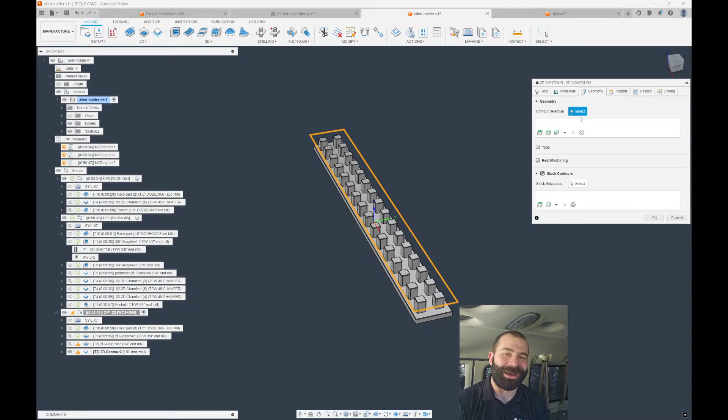I think it did, so it dumped the pocket selection there. And yeah, we lost our contour selection when we turned it into a template. So that answers the question: you can't link across tool paths and save them as a template and bring them back in.

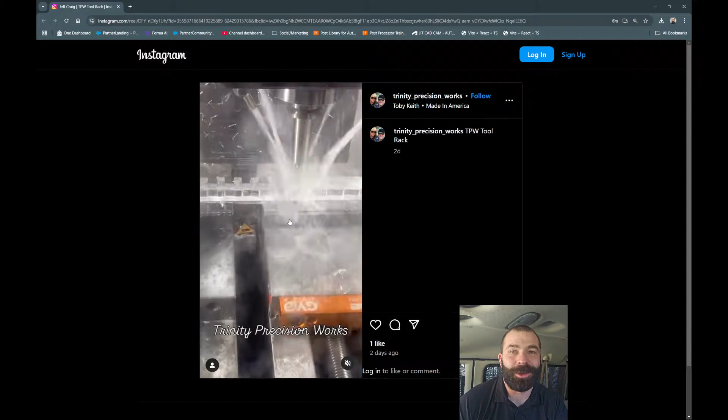So as it gets in there, that's what I'm talking about - you can see it doing its little shake and dance, scares a couple people every once in a while. Now, I don't know how well this is coming across for you guys to see.

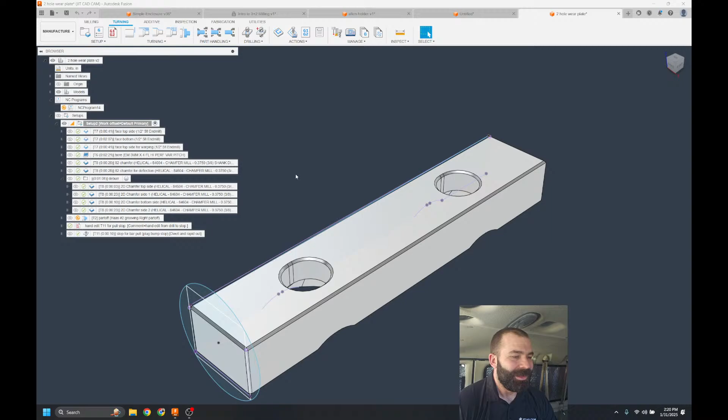So as you guys can see, what Joe is actually doing, it looks like he's got his first... oh, he's doing these on there. Let me just make sure everything looks all right. So Joe, you're actually doing this in a lathe, which is really interesting to see.

Aren't we all a little slow? It's Friday, you should be slowing down.

So as you guys can see here, he's actually doing something kind of interesting where he's programmed in the ability to do a custom bump stop. This is genius, Joe. I love this, I love when I get to see you guys' stuff, because Joe today has just showed me that you can use a drill tool path as a bump stop in your machine. As funny as that is, that's pretty crazy, right? He's coming in and using that so you can hand pull or hand feed the next part. Genius, right? One of you guys out there is going to watch this and think that's genius, I'm going to do it. But he basically just did a comment so that, you know, hand edit from drill to stop.

Now Joe, you know we can actually do a custom drill tool path. If you go to your cycles, you have what's called custom. I've done this before, where you have the ability with a custom tool path to actually come down, stop, and then do an M01 or M00 so the operator can make that motion automatically. There's another way we could also do it, but I like the drill method. I like this, I'm going to make a Workflow Wednesday just for this.

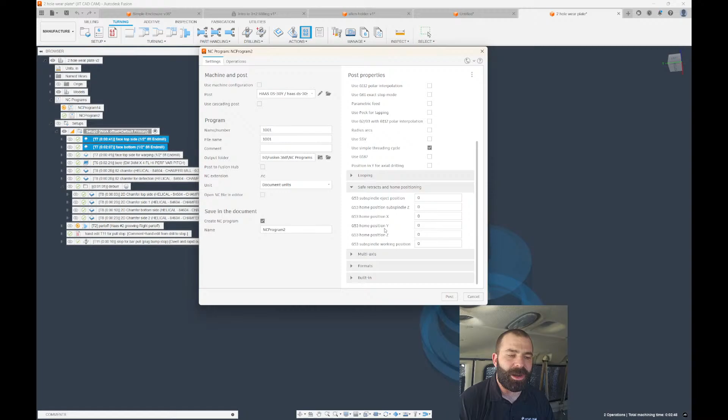All right, so we do have safe retracts. As you guys can see, we can actually set custom positions in our Y-axis or our X-axis based on what's going on. But I always like to post out to start with and see what codes we're getting, right? So if he didn't want to continuously jump, and this is where I'm going to show you guys, is when he gets down to the end of his program, he's always going back to zero. And this is his complaint, he doesn't want the machine to go all the way back or all the way retract up, as you guys can see.

Now, there are some things we could do here, like change that Y, as you guys saw in the post. So if I went in a second time, and when posting, this time I'm going to say in the X-axis, I want to stay down by 3 inches. So I'm going to say X-3, and we're going to repost that G code. What you guys will see is, of course, it's 3 radial, 6 diameter, that's why it's posting this way. But this would be a simple way to keep it down.

Now, you have to keep in mind the turret is going to that position. Now, if we did something with a tool change, I want to show this to you. So let's say we go from tool 7 to tool 8, right?

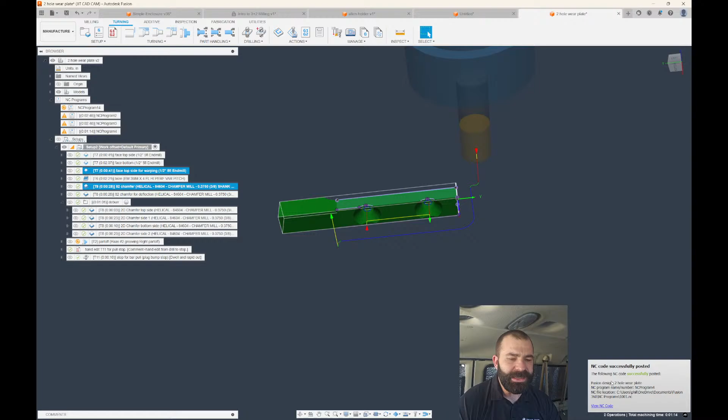So we're going to post this again. Where this can be a little bit dangerous is because we're not quite going back out to X0 for our tool change, as you guys can see here. So one thing we could do is we could always force an X0 on tool change and then use that X position at any time outside of a tool change. So that is one way you guys could do this, is to always force an X0 in certain situations, and that's on a tool change line.

And we could do that by editing the post. So what I'm going to do is go ahead and post process, and then hit the little pencil next to this because I need my post open. Now what I would do so I can easily find this in my code is post out those two tool paths again, but using the export CNC file to Visual Studio Code option.

What this is going to do now is spit out a file, and we're going to put this under a different number. Again, it's going to post the same, and it's going to give us a warning because this is kind of a weird post. But when we go back to Visual Studio Code, as you guys are seeing me pull this up, if I open this up, you do need to install this Fusion plugin. I always want to make sure people are aware, you need the plugin for this to work.

So what we're going to do is go down here to the bottom, as you guys have seen me do probably a million times at this point, and we're looking for that category called custom, which you will only get once posting with the actual export to NC. There's my 1212 file. And now, as you can see, it basically spit out the exact same program. However, I can edit this program.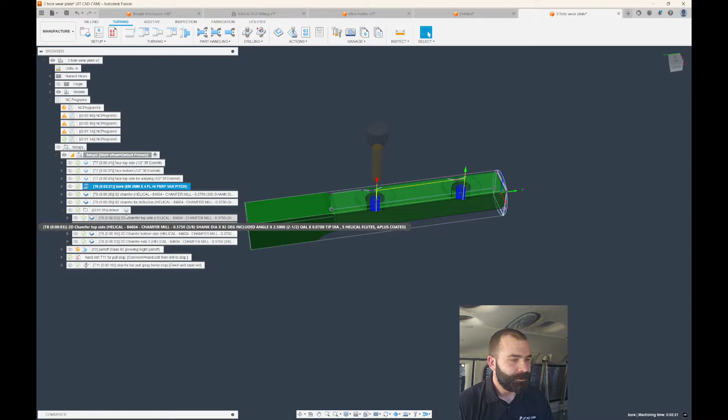Another thing for you guys to see here, Joe, I'm going to show you this one. This is actually a pretty good one. It looks like you guys are doing a bore toolpath. However, this is something I think a lot of people fail to realize: he's boring an oblong hole, right? So it is 3/8 square.

Awesome. So you're running 3/8 square through your, what is that, a 5C or whatever on your DS? But as you can see, he is using the ramp toolpath with a boundary selection to go in and ramp downwards at an angle to cut that profile. So he's using X, Y, and Z. Now, another way Joe could have done this is with a 2D contour.

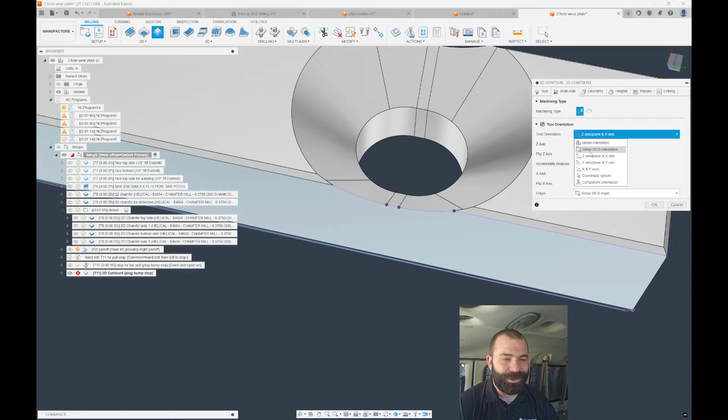Not wrong, you're not wrong. But what I'm going to do is go ahead and use that fancy new feature, right? We're going to say coordinates is the same as this. Man, this is so cool. I love this. This is probably one of the best updates in a while.

But now that I picked my geometry, right, I'm not going to do both of them. It's not a big deal. But I could have set this with a ramp and then plugged in my information as such, right? So again, he did it based on using the ramp toolpath. I'm using ramp inside a 2D contour.

Again, neither is right or wrong, guys. You guys can see how we can get different results. It's still all the same. So presumably he's going to start from this height. He's probably going to punch down through the bottom 20 or so.

And as you're going to see, we need a finish feed rate because somebody, yours truly, didn't pick the right tool. So what tool is he using? Tool 6.

Again, he has that ability to set his speeds and feeds. And as you can see, I'm now using a ramp tool, or a ramp lead-in, and then machining at a final feed rate. So one thing about this way, Joe, again, nothing wrong here. You can go ahead and actually set a different feed rate for the red because that is a ramping feed rate, versus when you did it up here, you did it all with the same feed rate and then ramped down.

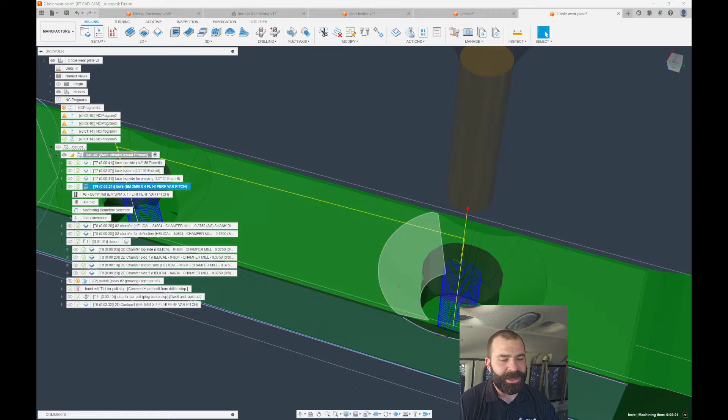Another couple of things, if it was very important, we could go in and set that to use things like tool wear so we could comp it if it was critical and stuff of that nature, right?

So Jeff, I see you out. Can you get a modified version of the part? Sure thing, we can get you a modified version of that part. I don't know, did we really modify all that much? Not a big deal. We can go ahead and hit save. I'll get you a copy of this sent over right away.

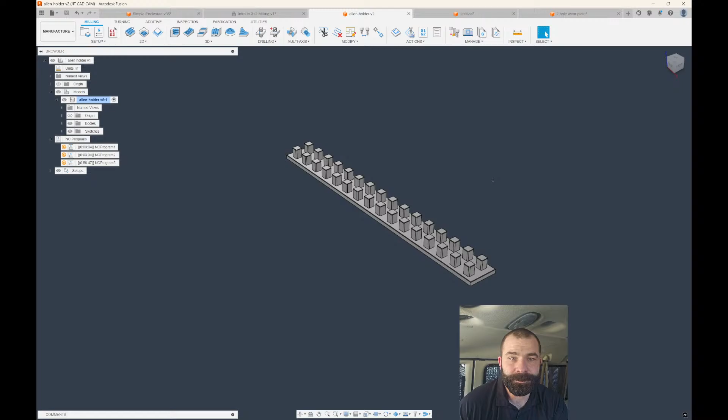Oh, of course, now I closed it out and it's complete. Jeff, I'll send this back to you so I don't have to close out my screen.

But what I'm understanding is somebody has a pyramid fixture for their machine and they have angled fixtures on it. So an example of that would be, I'm going to draw this up real fast for all of you.

Now, this is not going to be the right way to design something like this, so bear with me. But let's just say the base of this thing is 12 inches and the height is 5. And then hypothetically, we're actually going to add some flats to it. Whatever those angles are, you guys will know better than me. Or you could go out and grab a model from somewhere.

There we go, and then I am going to go ahead and pattern circular features. There we go, so we got a three-sided pyramid, right?

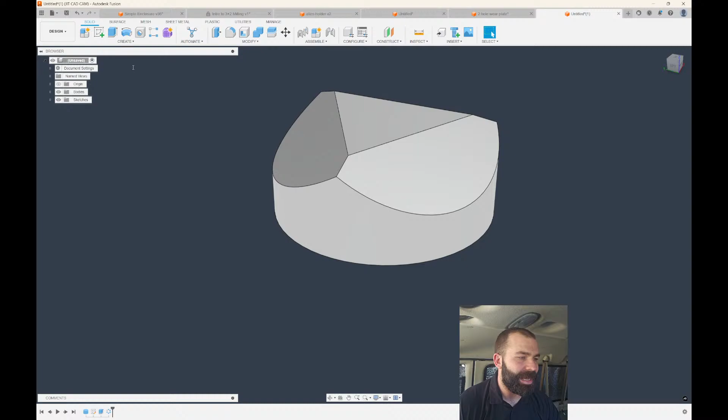Now what I'm going to do again is I'm going to do this very generically where I'm just going to draw a simple part for example purposes of what he's asking, right? So again, here's that part we're machining. This is a new body. Again guys, components, use components, components, components. I can't make this up enough.

Please use components, don't do it this way. This is your disclaimer this week. But if I was going to manufacture something on a riser or on an angled fixtured situation, when I create my setup, and there's a reason I went with something like this, is because I can put this on like a UMC. We don't want to download that model. Let's go to my machines.

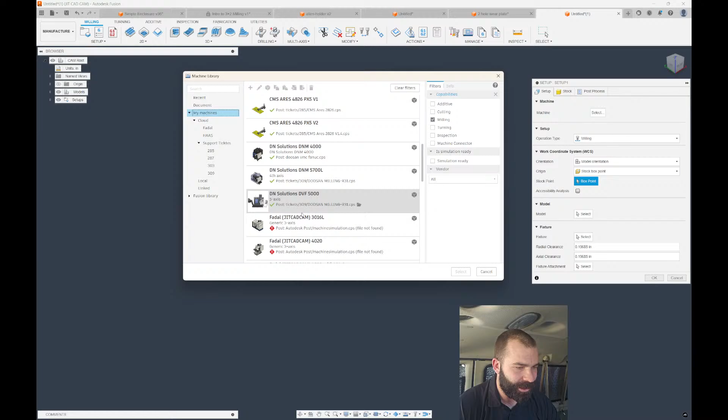And I feel like we brought in a 5-axis just last week, didn't we? This is a 5-axis, isn't it? Yeah, there it is, BC. Let's put it on a Doosan. Let's change it up.

And of course, yours truly failed to save this file, so let's get this saved here real quick. There we go, and now we can hopefully do it right this time.

So again, we're going to select a machine. We're going to put this on a Doosan. Maybe, starting to like it. There we go, so we got our fixture on our planner. We have our parts orientated.

So the question is how would I go about utilizing this and setting this up and then running it at the machine, right? So the problem that is going to happen is if I go in and I say my Z-axis is over here, one, yes, my stock is turned. Let's get our X-axis squared up too. That is the model we want to manufacture, but our part position, as you are seeing, is still stuck in the realm of being angular, right?

So the problem is right now inside of Fusion, you don't have the ability to align that pyramid at a different angle than the XYZ based on your part. Now keep in mind, this is where we could change things up, which is where a lot of shops, when you talk 5-axis, start to talk about 0 point, right?

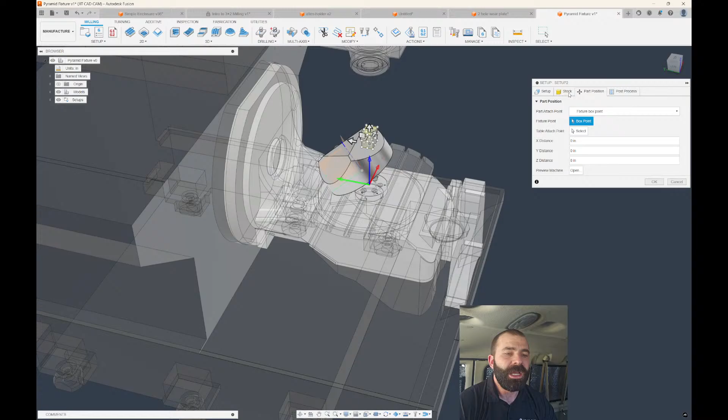So what I would almost tell you to do at the end of the day is, again, your Z and your X would actually be based off the pyramid fixture, right? So again, my Z is now up top. My X might be to the right still. However, my location for this could be based off a selected point, which might be bottom center of everything I do. Now presumably you would have to let me know, Nez, whether or not you're using something like a Fanuc control or Siemens.

Because the great thing inside of Fusion is, oh let's fix this here real quick guys. Let's get our fixture added in there just so we could see it. There's our fixture. And then what we're going to do, and then we need that set to 0 so it sits down on the table.

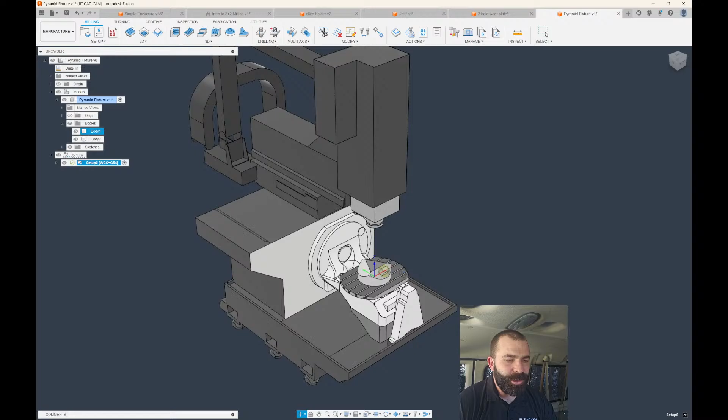So if you're dealing with a machine that is a Fanuc, Siemens, Heidenhain control, they also have plane shifting ability inside of that controller. What that allows you to do at the end of the day, when you start to create your tool paths, and we've kind of talked about a couple of different ways to do this, but if we set our tool orientation, because I want to face this block off, and then again, my X-axis could be still squared up the same.

But I can actually move my WCS to wherever I want it, right? So as you can see right now, my WCS could be that corner. Now this isn't going to move that work coordinates from the center of my part. What it actually is going to do is do a plane shift inside of the actual controller so that the math lines up, right? So I do need to fix my stock.

Give me a sec here, guys. You would have to go from solid. It's going to be the same size as my part, which isn't a big deal. And there's my facing procedure. So if I was to post this out, again we're using the Fanuc post processor in this case, and we're going to go ahead and hope everything goes kosher here. But we're going to get our G68.2 in most cases to shift this.

And in this part, we actually aren't getting it. So we would need to modify our post to get our G68.2 shift. But it would shift it from here.

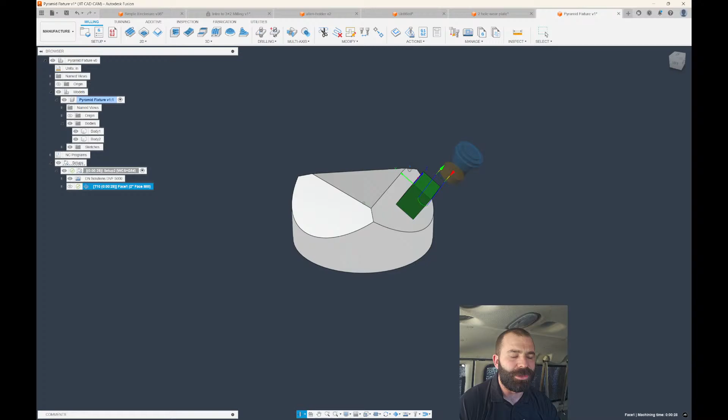Now, keep in mind, this is why I tell you guys, when using Fusion simulation right now, it's not going to allow you to accommodate on that Haas machine, or any machine, by setting your XYZ the way we were and putting it perfectly flat on that actual table.

Now, something I have done for a lot of customers is the ability, when you're doing something like this, we've actually put that fixture on the machine sim. So it's in the machine sim file, and then your machine by default is orientated to something. Actually, I can show it here.

This is nice, Autodesk is- somebody asked a question, what do I think about updates? I love updates because they allow me to go in and show you guys a lot of neat things. Again, it's based on the idea that when we run this...

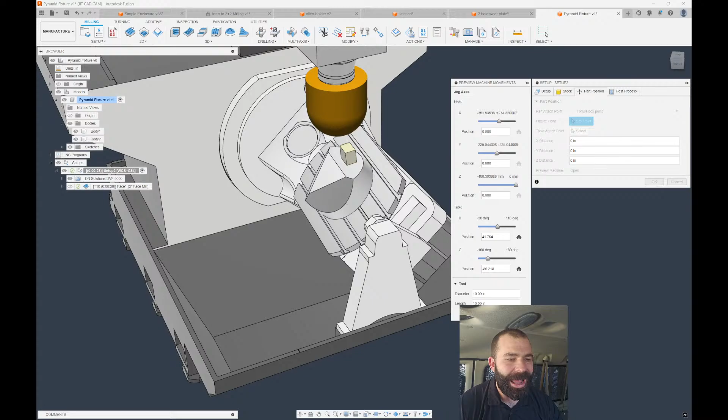We would actually model your machine sim like this. So the tombstone would be in there, or your riser would be in there, so that when you're working in this particular fashion with the riser, it is orientated to the XYZ position as if you were going to probe it. This makes your life a million times easier, and it would allow you to work with a part at a weird angle on a tombstone.

By all means, I've made videos on this so you guys can go out there and see it. It's very easy to add stuff to a machine sim file. I actually have a video of a UMC 750 where we put a Kurt vise on the side of it, where it's got those lovely mounting holes.

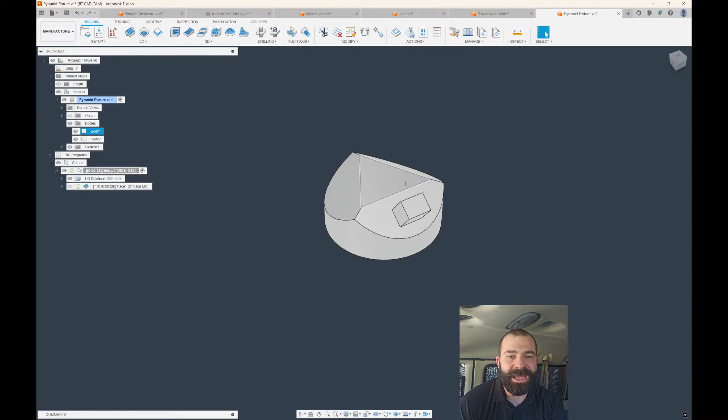Haas post, there is a fast tool change. How can I add this feature? So Deep Thinker, are you talking about preloading tools?

So I'm going to have to pull up the Haas post now. Oh, I can't even edit that one. Oh, you're talking about fast tool change right here?

So again, we would have to add in a couple of those items, but I would say my question always comes down to, is that something you need on every post for every machine in your shop, or is it specifically just one machine? Because it may actually be easier at the end of the day.

Hold on here. Actually, yeah, we could do this. So we're going to go ahead and just pop open a milling 2D face. Oh, nope, we need a tool change, don't we? So we're going to scroll down further.

As you're going to see, in this case, the reason why I asked this question is because if Deep Thinker only has one machine with a FANUC control, we could obviously edit that post and not worry about his other machines. Now, given he may have multiple machines, FANUC control, some with fast tool change, some without, he has that ability, again, to just take a copy of a post.

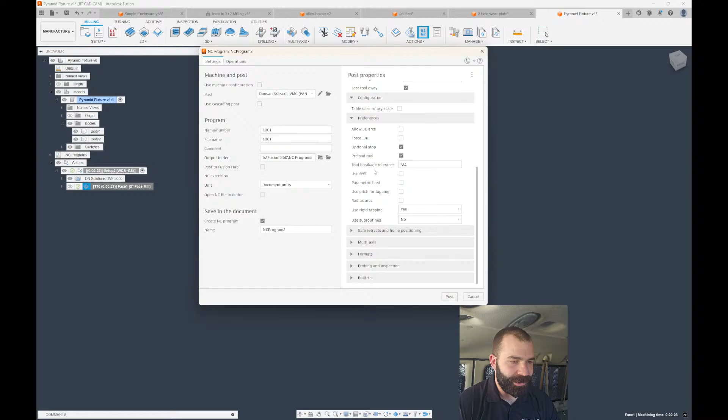Preload tools is checked, okay. But, oh, of course, yours truly is breaking these posts. Direction not supported, that won't matter. But as you guys can see, you could go in and make those changes. Deep Thinker, I'm always happy to help you if you want to send me a copy of your post, and we could take a look at it and see what we could do.

But as you guys know, I love to give you guys all the answers as much as I can. And as you guys saw, what I would do is just use the export to NC, and then I would reload it in, and I would use that as my debug based on the actual tool paths and the examples that I need, right? So that's all I do at the end of the day is a little Control F work and using the tools that Autodesk has built to make my life much easier.